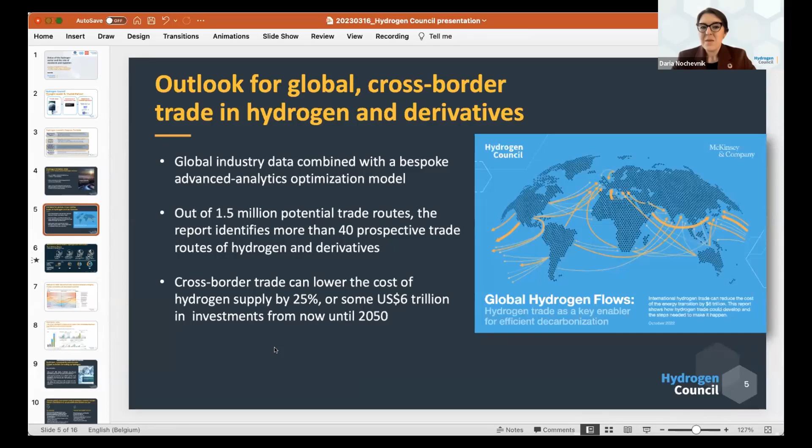Unlocking these investments and trade corridors would of course mean that the geopolitics of global cross-border trade in energy and commodities is going to evolve and change. We see a picture where the supply routes for some of the major demand pool regions are going to be much more diversified compared to the status quo. So in our study, we have identified some key phases in which cross-border trade in hydrogen derivatives would evolve.

We see that in the first phase, especially between now and 2030-2035, we expect high uptake in hydrogen derivatives, in particular ammonia and synthetic fuels.

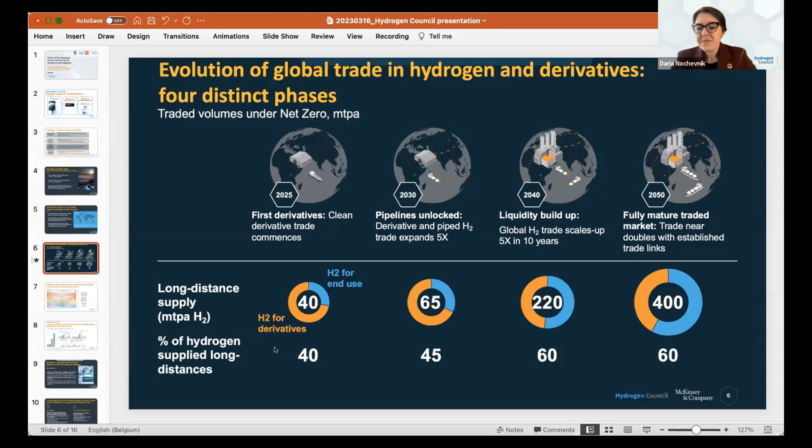Then between 2035 and 2040, pipeline infrastructure will be maturing and expanding in parallel with liquid hydrogen infrastructure. So we see pipeline and liquid hydrogen infrastructure picking up after 2035 and maturing in parallel with continued development of shipments in hydrogen derivatives.

We see that emerging market economies can play a significant role in this global hydrogen value chain that will be emerging over time. Some countries and regions, in particular Latin America, Namibia, and South Africa, are going to become prime destinations for the development of, for example, synthetic kerosene and its export globally. Brazil is likely to be one of the leading players in green steel.

We expect that some countries, in particular the Middle East and Chile, will emerge as the most cost-competitive suppliers of renewable and low-carbon hydrogen globally. By 2050, hydrogen costs could be brought down to less than $1 per kilo, thanks to exceptional solar potential, supported by wind, enabling renewable hydrogen production - and in the case of the Middle East, lowest cost natural gas coupled with CCS. So we see Chile, Qatar, Oman, Saudi Arabia, and UAE going forward as some of the lowest cost suppliers of renewable hydrogen globally.

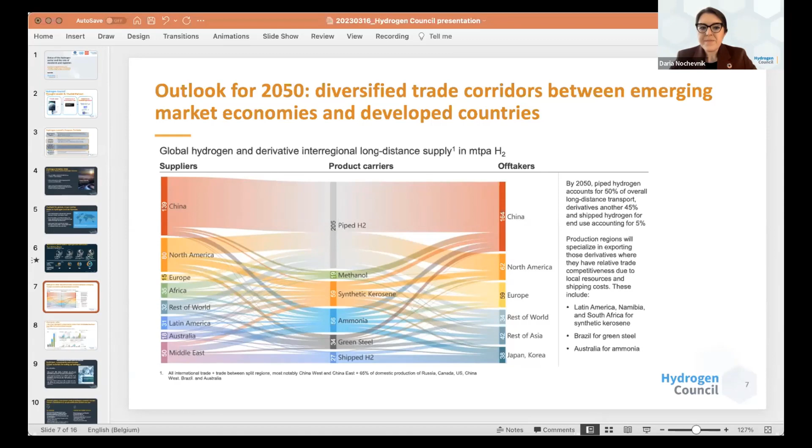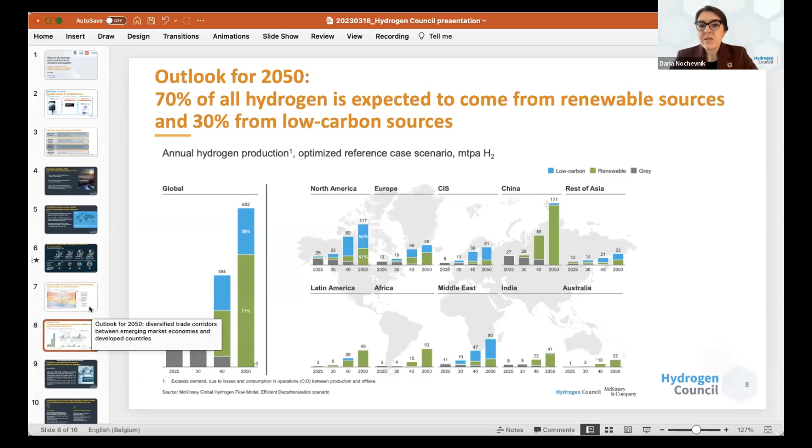This is just a snapshot of the modeling work that we have done, showing how by mid-century more than 70% of hydrogen traded globally is expected to come from renewable sources, if not more. So overwhelmingly, the majority of prospective trade flows will be focused on renewable hydrogen, and emerging market economies can play a significant role in this global hydrogen ecosystem that is already emerging.

Interestingly, we have also looked at the role of critical raw materials in the development of hydrogen ecosystems. One of the key takeaways is that we absolutely need hydrogen technologies to ensure that we don't substitute one dependency for another. A number of countries around the world are currently really concerned about dependency.

Dependency on either a specific type of energy source or a specific type of manufacturing supply chain component that is necessary for their economies to function. We see that with hydrogen and hydrogen fuel cell technologies, there's a real opportunity to ensure the sort of technological diversification that is crucial not only for our transition to net zero and decarbonization pathway, but also making sure security of supply is achieved through trade flow diversification, commodity diversification, and diversification of the core materials used in supply chains of clean energy solutions.

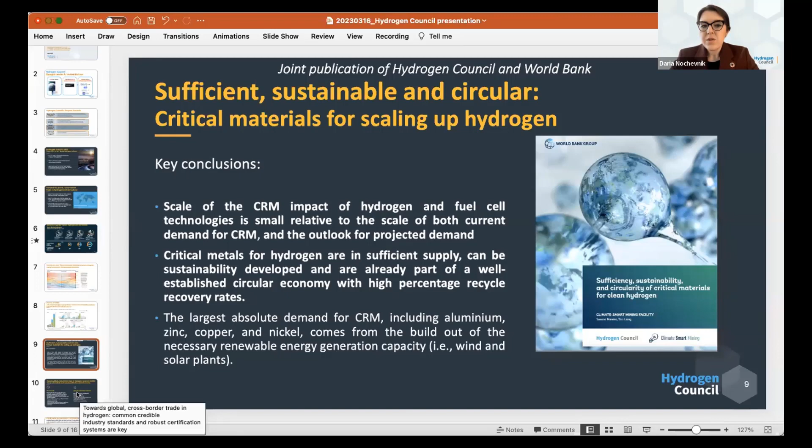As was mentioned already by our speakers previously, we truly believe it is crucial that emerging market economies take full part in the development and shaping of global standards, and rather than being standard takers, are indeed standard makers and contribute to the development of common global industry standards.

Within the Council, we are very much supporting the development of the relevant ISO standards, in particular the standard methodology for assessing the carbon footprint of hydrogen production, conditioning, and transport. I'm sure Andrei is going to talk more about this process in a few minutes, as well as the development of certification schemes for hydrogen. The two, of course, go very much hand in hand.

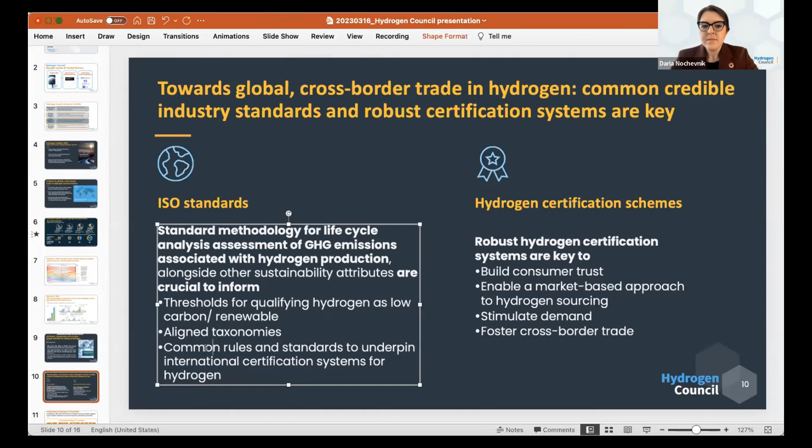I will skip through the slide briefly because I'm sure Andrei will elaborate on it more. But we see that the very foundation for the development of relevant hydrogen policies is around ensuring that we use a common methodology for assessing the carbon footprint of hydrogen production, conditioning, and transport in a way that is harmonized and coherent.

Oftentimes we talk about the development of different thresholds for hydrogen, for example, or derivatives - country A can have a threshold of 2 kilos of CO2 equivalent per kilo of hydrogen, and country B can have a threshold of 2 kilos of CO2 equivalent per kilo of hydrogen. But those 2 and 2 effectively may not be comparable unless there is a common methodology to calculate and arrive at those 2 kilos.

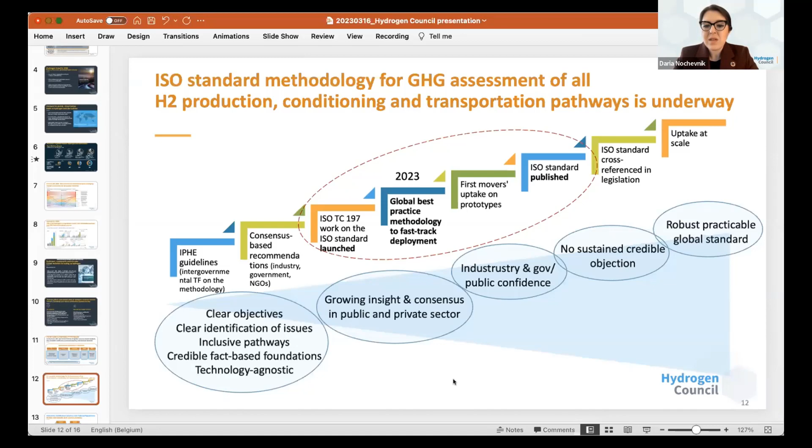So we see this standard methodology in particular as being the foundation for the development of the hydrogen economy and some of the policy choices that may be made in different corners of the world over the types of hydrogen that countries may wish to support. This is a way to ensure transparency at a global level, in particular allowing the least carbon-intensive solution to shine and the least carbon-intensive hydrogen production and transport pathway to reveal their climate benefits. We see this as an absolutely crucial piece, and I'm sure Andrei will elaborate on it going forward.

Just very briefly on the relationship between standards, policies, and certification schemes. Oftentimes those may be used interchangeably, but we feel it's really important to lay out the differences and the interlinkages between these clearly. ISO standards already play a crucial role in underpinning some of the global policies and policies adopted at national level.

For example, the EU taxonomy for sustainable finance that lays out the rule for qualifying hydrogen manufacturing as a sustainable economic activity refers to ISO standards as one of the options to assess in particular the carbon footprint of that hydrogen manufacturing process. So already ISO standards are informing national and regional policies.

Going forward, they will play a crucial role in informing also certification schemes for hydrogen, used to evidence that a certain unit of hydrogen has a certain carbon footprint, but also has relevant socioeconomic attributes and other elements of the sustainability characteristics of hydrogen beyond carbon footprint.

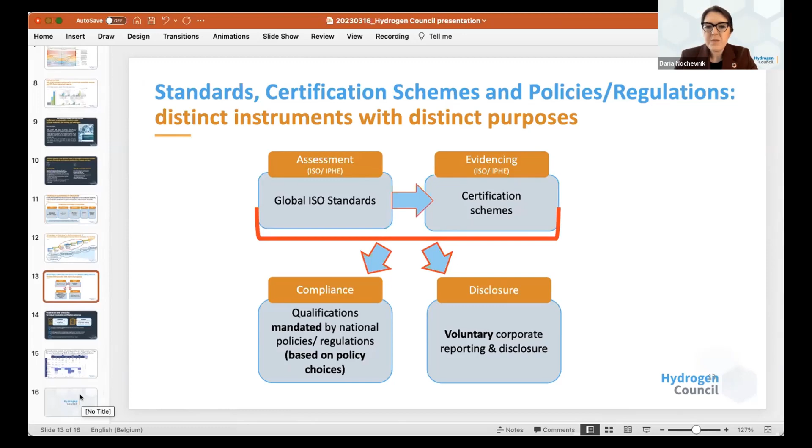We have carried out an analysis of existing policies and instruments that drive the need for evidencing the sustainability attributes of both hydrogen and derivatives. This snapshot, I'm not going to go through all the details in the interest of time, but it gives you a flavor of the diversity in approaches we see in terms of the policy choices regarding the types of sustainability attributes that governments wish to evidence as part of their compliance frameworks, and the approaches to evidencing that they choose.

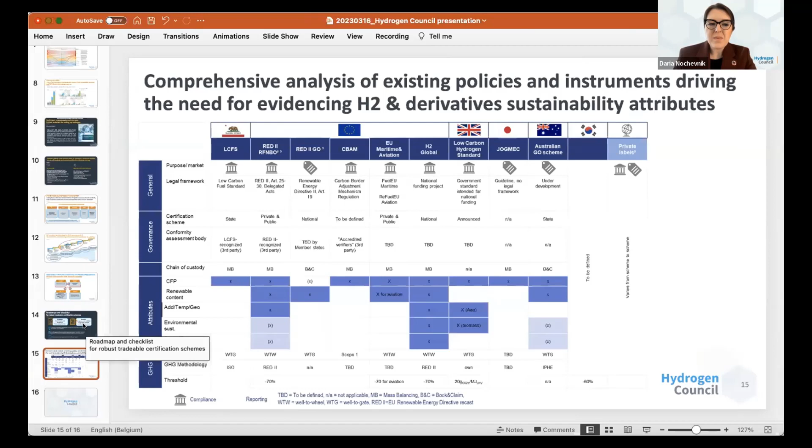This diversity of approaches is something we have analyzed and looked at very closely, and it informed some of the work we are doing currently. We're pleased to say that very soon we will be publishing a dedicated certification study, focusing in particular on how one can identify solutions for different approaches to evidencing sustainability attributes through certification to talk to each other, and how we can achieve a form of common ground for governments across jurisdictions and for relevant legislators to commit to mutual recognition between certification schemes for hydrogen and derivatives.

I'll stop here, but I would emphasize again that we see an absolutely crucial role for global international standards to inform certification schemes, and this is a good example of a tangible instrument that is required for the market to take off. Thank you.

Last year, the National Development and Reform Commission and the National Energy Administration released a plan for the development of hydrogen energy. The document points out hydrogen is an important part of the national energy system, an important carrier to green and low carbon transformation of energy and industrial department, and an important direction of strategic emerging industries and the future industry.

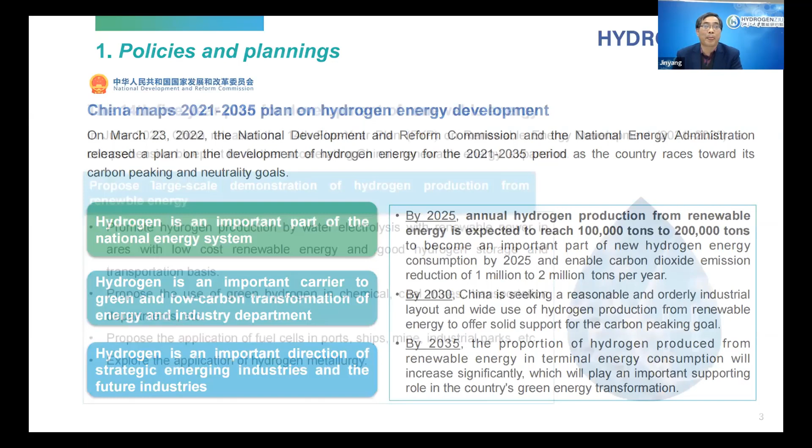Also last year, China released the 14th five-year plan on renewable energy development, a comprehensive blueprint for accelerating China's renewable energy.

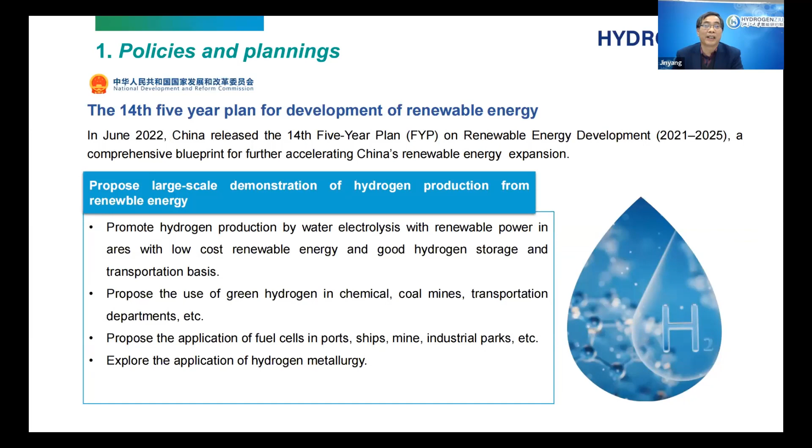Fuel cell vehicle technology research and development has been a highlight of the Ministry of Science and Technology for a long time. Since 2001, many research and development programs have been given to hydrogen energy. During the 14th five-year plan, from 2021 to 2025, a key national R&D program of hydrogen energy technology was taken, and 4 areas will be focused: green hydrogen production and scale transfer system, safe storage and rapid transmission and distribution system, convenient hydrogen upgrading and efficient power system, and comprehensive demonstration, hydrogen into thousands of homes.

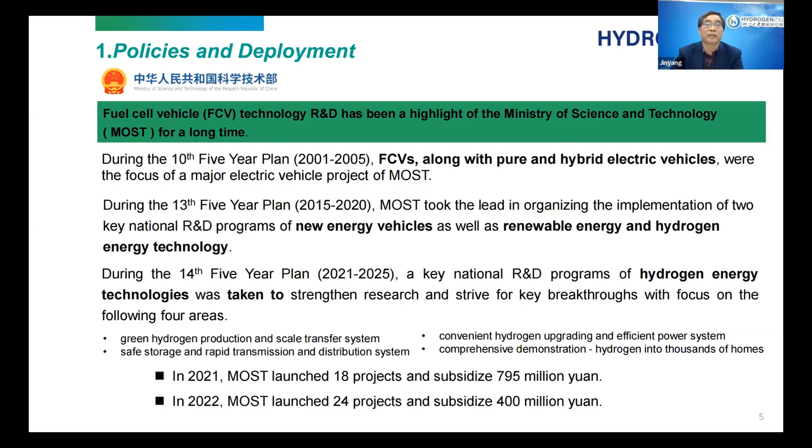Now come to development of hydrogen industry.

About 33 million tons of hydrogen was produced in China last year, which makes China the world leader in hydrogen output. According to analysis, in 2060 there will be 130 million tons per year of hydrogen required.

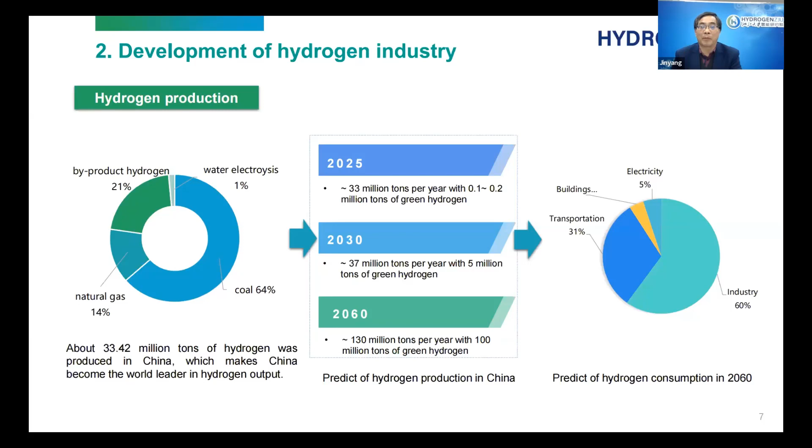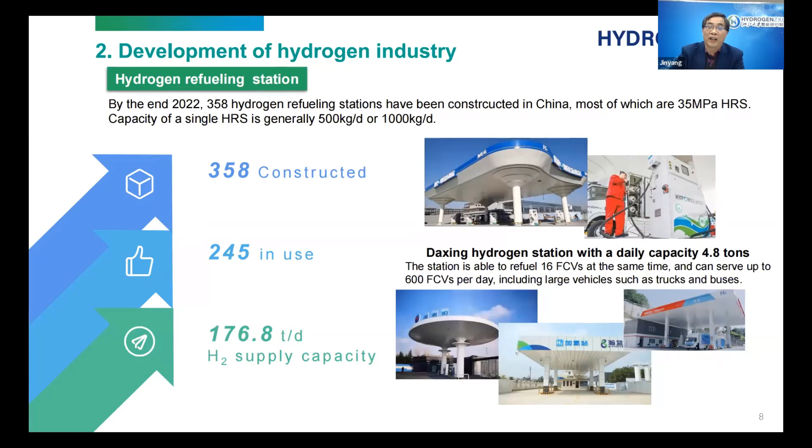About hydrogen refueling stations, by the end of last year, 358 hydrogen refueling stations had been constructed, most of them 35 megapascal stations, and 245 HRS are in use. The largest station is the Daxing hydrogen station with a daily capacity of 4.8 tons each day.

About electrolyzers, 3 kinds are developed in China: alkaline, PEM, and SOEC. For example, alkaline water electrolyzer, 5 megawatt alkaline electrolyzers are in mass production.

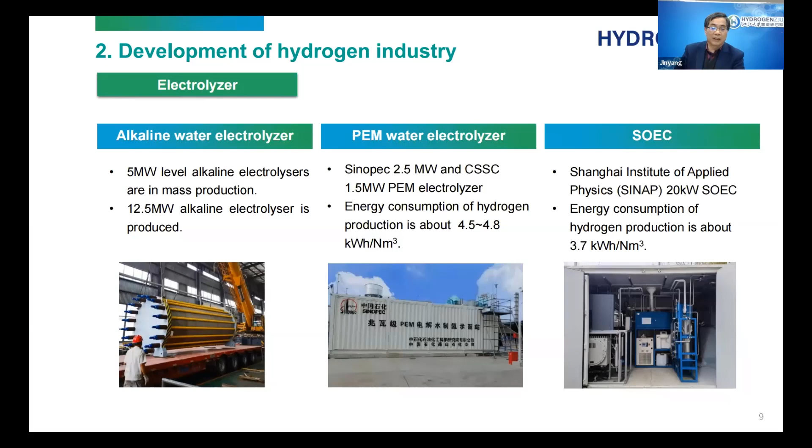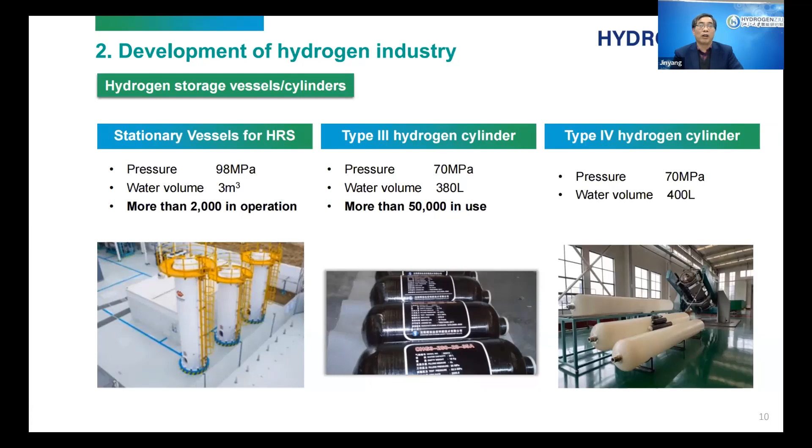Our national standard for type 4 hydrogen cylinders will be issued soon, with a pressure of 70 megapascal. We also develop test facilities for the hydrogen industry.

Here are 3 examples of such test facilities. One is metal hydrogen compatibility, with maximum pressure of 140 megapascal. Second is polymer hydrogen compatibility, with temperature ranging from -60 to 200 degrees Celsius. Third is high pressure hydrogen impact test system, with maximum pressure of 140 megapascal.

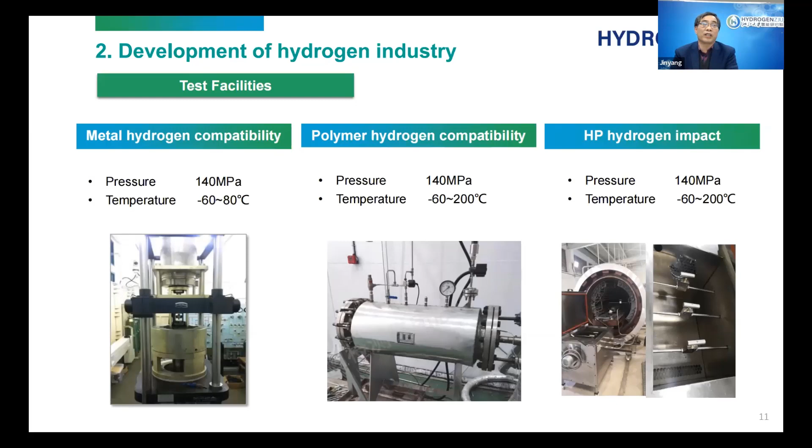We also develop standards for hydrogen production by water electrolysis. There are 2 standards developed by ISO, and we mostly incorporate this ISO standard into our national standard.

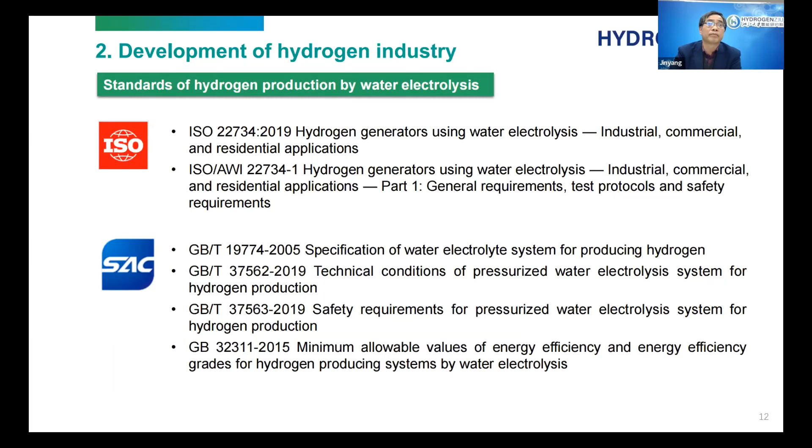About application, by the end of last year, the number of fuel cell vehicles in China reached 12,682, accounting for about 20% in the world.

Hydrogen vehicles were demonstrated in the 2022 Winter Olympics, the world's largest demonstration of hydrogen vehicles. Other applications include forklifts, bicycles, fuel cell hybrid locomotives, boat backup power, and aircraft.

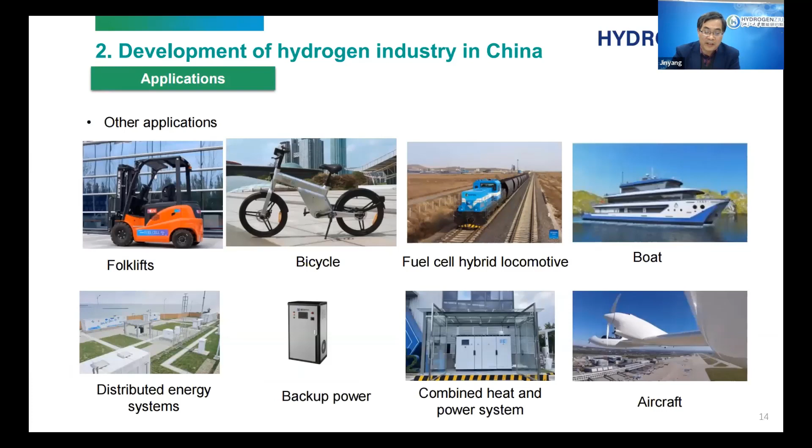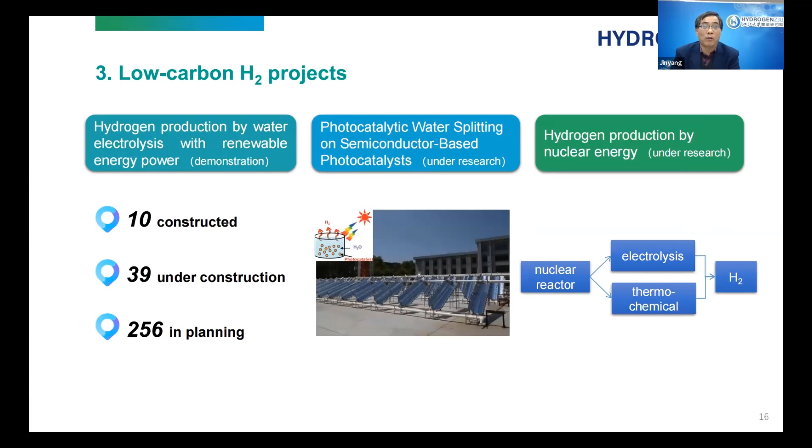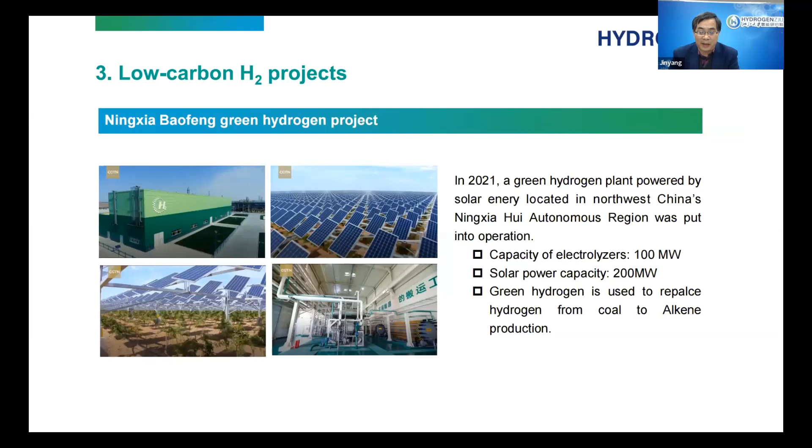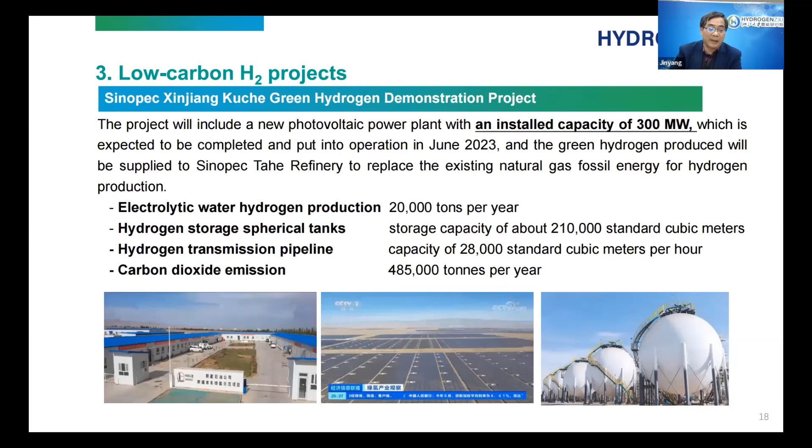Second is the Sinopec Xinjiang Kuche Green Hydrogen demonstration project. In this project, electrolytic water hydrogen production is 20,000 tons per year, and the hydrogen storage spherical tank has a storage capacity of about 210,000 standard cubic meters.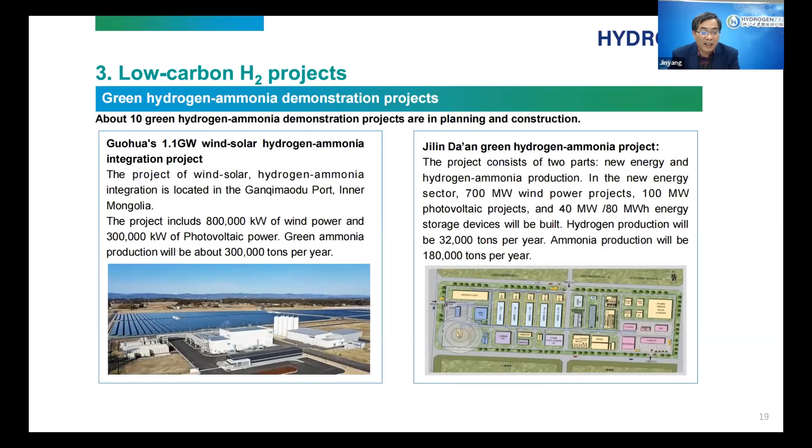The third project is the green hydrogen ammonia demonstration project. In China, there are about 10 green hydrogen ammonia demonstration projects in planning and construction. And the first green hydrogen methanol demonstration project is developed by China Coal and the Dalian Institute of Chemical Physics.

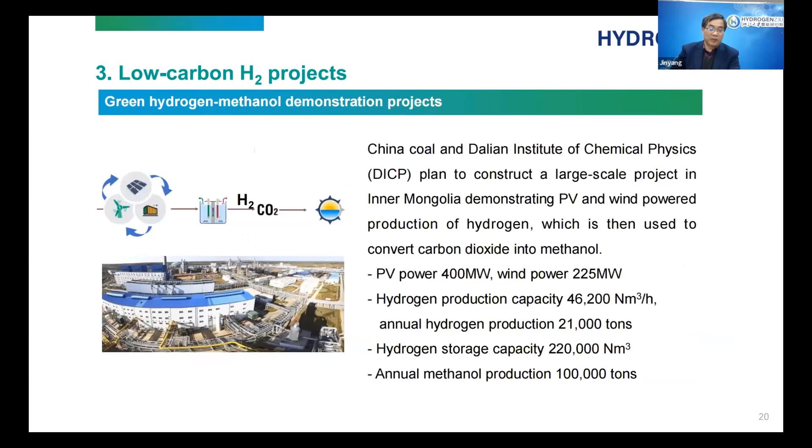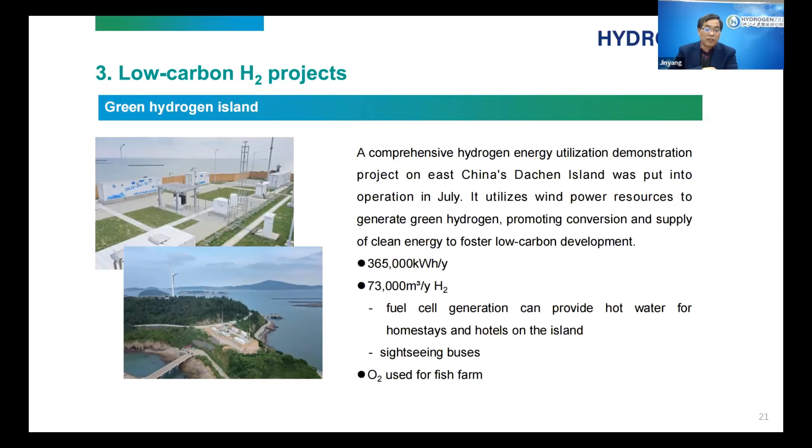Also, green hydrogen Island, a comprehensive hydrogen energy utilization demonstration project on East Chinese Dachen Island, was put into operation last year. We also have a comprehensive application of hydrogen energy project, a megawatt level demonstration station for the comprehensive utilization of hydrogen energy in East Chinese Anhui province.

About hydrogen storage and transportation, there are several projects on hydrogen pipeline construction. For example, the Gansu Yumen oil field hydrogen pipeline project, where the operating pressure is 2.5 megapascal.

AP have a liquid hydrogen project in the east of China, Zhejiang province, and the liquid hydrogen production is 30 tons per day.

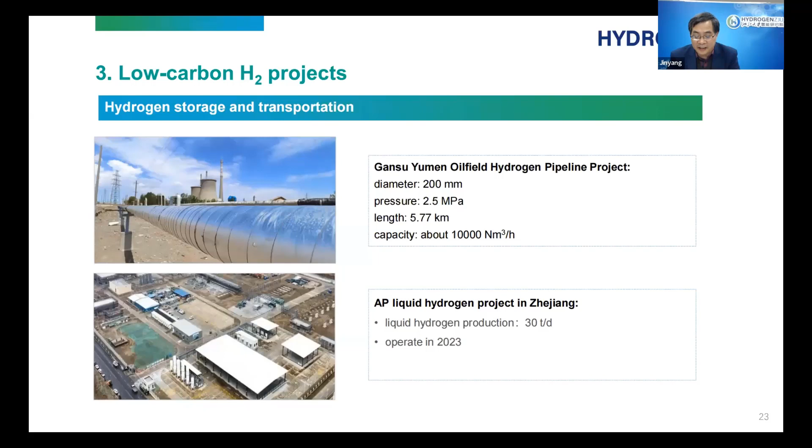Finally, I give some suggestions. Development of low carbon hydrogen relies on the development of low carbon hydrogen production technology. We should pay more attention on water electrolyzer and also new technology.

Application of low carbon hydrogen in different departments is very important. We should expand application of low carbon hydrogen.

Also, standard for low carbon hydrogen is very important. We need a standard to support low carbon hydrogen evaluation, testing, and verification. That's all, thank you very much.

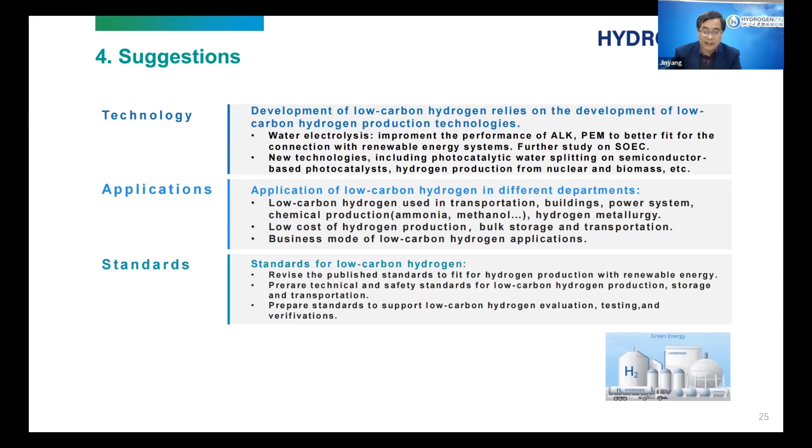Thank you, Dr. Jinyang, for that very clear presentation. We see that China has many projects all along the value chain of green hydrogen, and it is in line with the presentation of Daria, where we see that China is leading the deployment of electrolyzers. For those who are participating from countries that have plans or are in the process of planning green hydrogen or renewable hydrogen or low carbon hydrogen value chain,

we want to have this workshop to raise awareness of what is needed, especially in the area of standards. At the beginning, we mentioned that it is very important for different participants in standard setting, not only taking the standards once it's developed, and that is the role of ISO. Our next presenter is from ISO.

She will be presenting the role of ISO and how developing countries can participate in international standard setting. Roswitha Franz is head of planning and operations at the capacity building unit at ISO. Over to you, Roswitha. Thank you very much, Juan Pablo, for this nice segue from a very practical example of

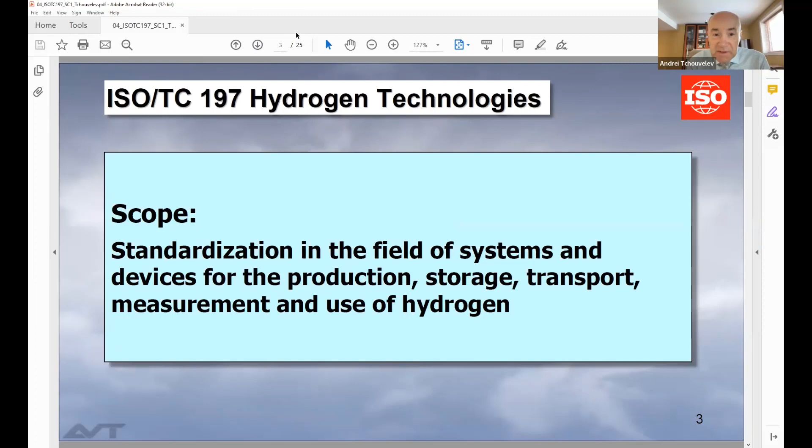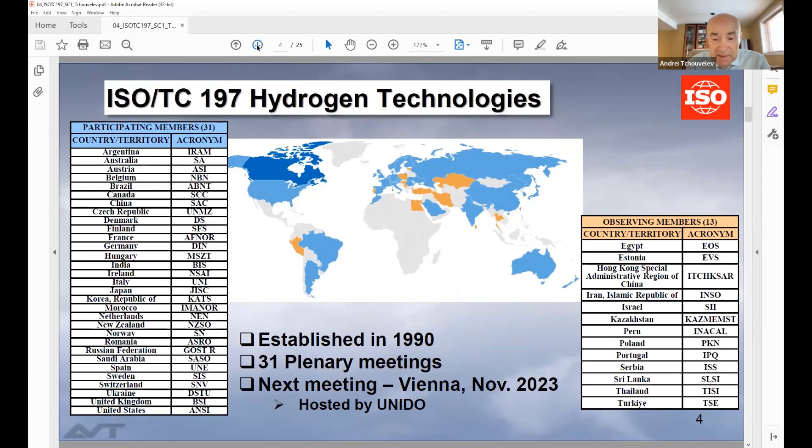So following Rosita's presentation before me explaining the process, please join the hydrogen standard development work and become the standard makers. Next slide, please. In the next 3 slides, I'll show you different stages of development so you can see the evolution—it's kind of mentally divided before COVID, during COVID, and after COVID.

Hydrogen Technologies Committee has been focusing traditionally on the core fundamental technologies for hydrogen. So the core experts include different production pathways and storage, mostly because this was the biggest challenge. Professor Chen showed some examples of the storage technologies used, both the large type 1 tank, shown on one of the slides, as well as the compact tank. That's a variety of applications, including pressure vessels and gas cylinders. So these were mostly the focus.

And in recent years, with the development and deployment of hydrogen fuel cell vehicles, mostly light-duty vehicles, that has been the primary focus of the last years, to make sure we support the hydrogen infrastructure for mobility.

So the standards highlighted in red are what has been published by 2020. You can see, for example, in the vehicle components, there's a mention of alignment with GTR 13, the global technical regulation, and the UNECE Working Party 29 that develops global technical regulations for hydrogen fuel cell vehicles. You can see direct reference to that, which means the ISO standards support directly the implementation of the global technical regulations, and this is very important.

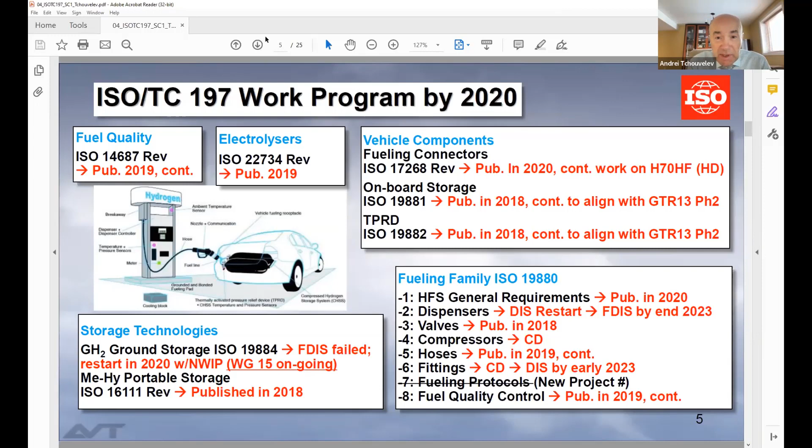That covers the period between 2020 and 2022, really during the COVID time, where we worked remotely. It was reflected in Professor Chen's slide when he mentioned electrolysis. So we split it into parts, one to address dynamic performance and safety, with reference to renewable energy connection and application, and the other standard for testing for grid service.

This is another important use of water electrolysis technology, where it can help balance the grid, which will be fed particularly going forward through renewable energy sources.

Very important work on safety. You can see ISO TR 15916, another revision specifically related to material compatibility and expanding the liquid hydrogen chapter. We anticipate that liquid hydrogen will play a more significant role. It was reflected in Daria's presentation on trade flows, and also shown in one of Professor Chen's slides related to pipelines. So material compatibility is a critical component.

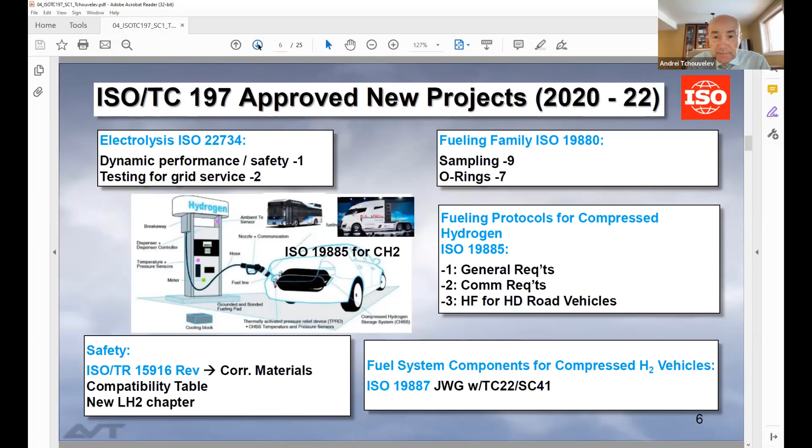Finally, going forward, the very recent work we approved: at the top is liquid and SLH2, which means subcooled liquid, a new liquid hydrogen technology which helps eliminate boil-off and improve the efficiency of fueling. These are revisions of very old standards, one from the last millennium, 1999, and the other from 2006. Those standards were influenced by participation from NASA at that point.

Now it's driven really by industry, by the heavy duty industry for road mobility, to make sure we have the standards in place. And you can see the CCH2, which means cryo-compressed applications, a new technology. That's a new project we just approved, and a new working group will be created to develop the related standard.

Now we go to the sustainability aspect within the subcommittee. One that we established last year: we started work on the methodology for determining greenhouse gas emissions associated with production, conditioning, and transport. That's the technical specification I'll be talking about a little later.

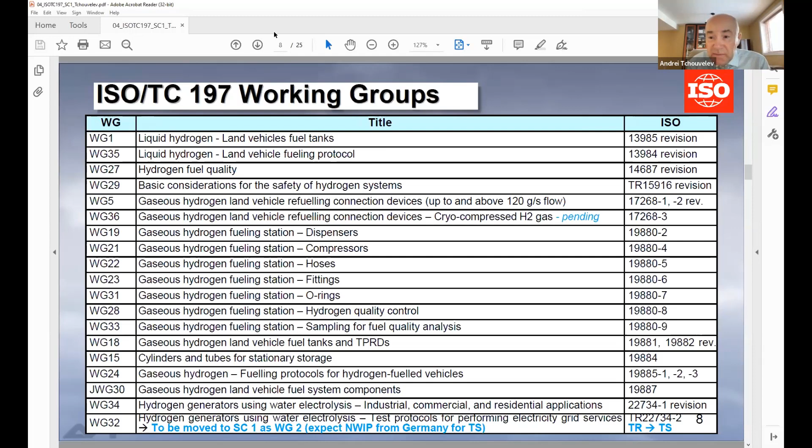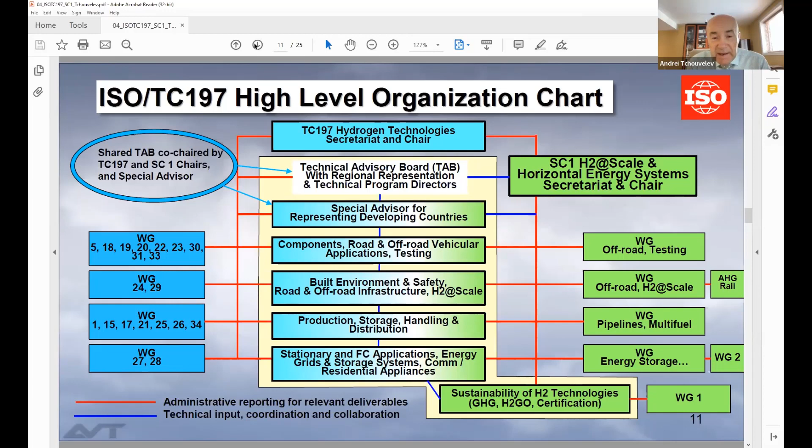That's really a very good explanation on the division of scope. TC-197 focuses on basic requirements on core technologies for hydrogen - production, storage, handling, built environment, and conventional mobility, which relates to road mobility: light, medium, and heavy duty. While subcommittee 1 focuses on applications of those technologies where hydrogen is a central link, so there could be overlap, obviously, with other fuels.

There was a question about ammonia - very good question, this is a tricky one. How we handle it: we will look at ammonia, for example, and LOHC, from the point of methodology for greenhouse gas footprint assessment solely. But looking at the specific other scope, we need to think about how we address that.

You can see also coordination with a variety of different stakeholders related to renewables and energy storage, multi-fuel systems, and various sustainability aspects. ISO TC-207 was mentioned, environmental management, as well as, for example, subcommittee 7 on climate change. We're collaborating with those different testing, different applications, including the residential - it's all kind of in the scope of collaboration. So next slide, please.

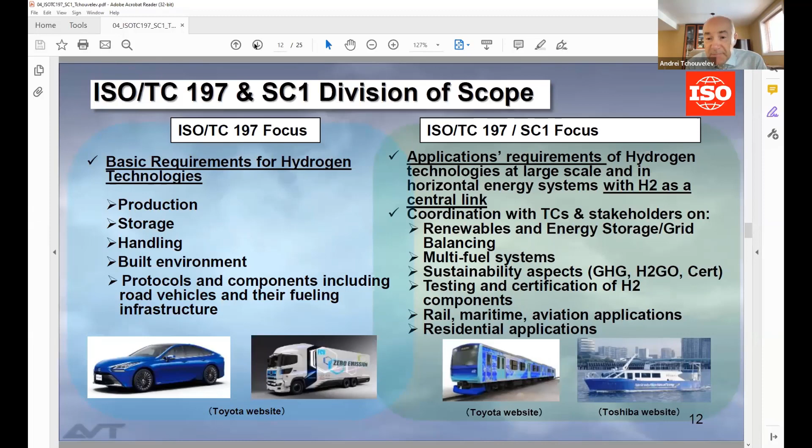Now specifically, well, that slide Daria already showed, so I'm not going to talk about it too much. So please, the next one.

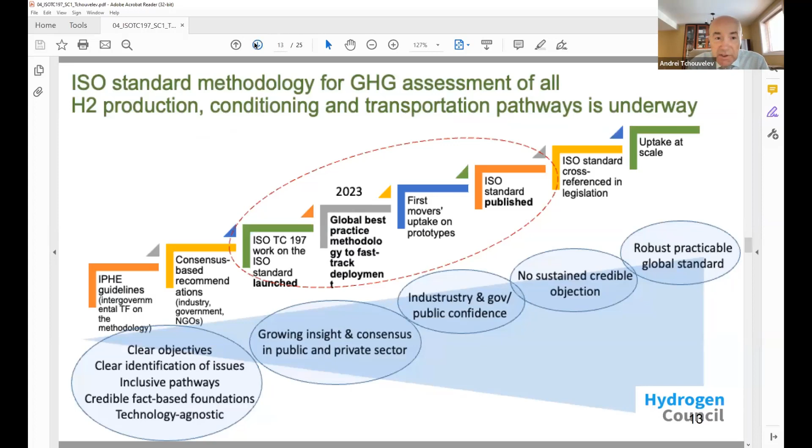As we discussed, we need to have a mutually agreed methodology for determining the greenhouse gas footprint. It's the first step and a very important part of the sustainability dimension that we're addressing. On the bar, on the left corner, you can see the title page of a working draft, submitted by IPHE, which will show on the next slide, but this is really the general approach.

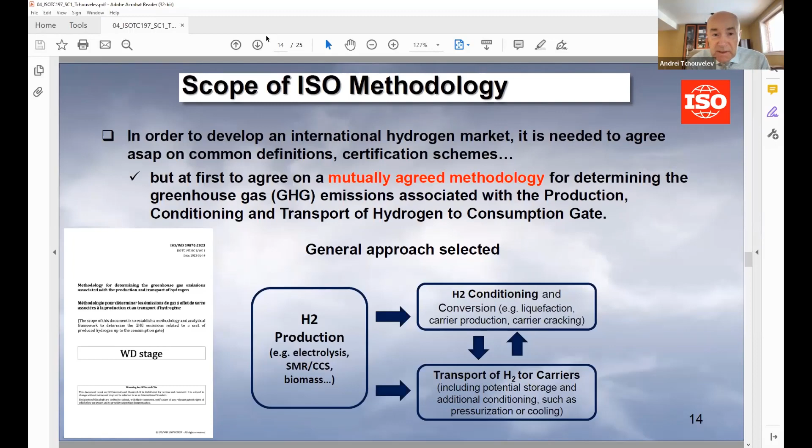We have hydrogen production pathways, multiple, including electrolysis, SMR with CCS, biomass, and so forth. We have hydrogen conditioning, meaning conversion, whether it's liquid, whether it's a derivative like ammonia, or whether it's LOHC, and then transport using different carriers. Next slide, please.

That's the guiding principles that were developed by IPHE, which is the International Partnership for Hydrogen and Fuel Cells in the Economy. The document, you can see the title page on the right, is available on the IPHE website. You can load it, but these are the guiding principles that we agreed with IPHE and adopted. That's foundational for this.

It should be inclusive, it should be flexible, it should be transparent, it should be comparable, and it should be practical. So these are the key words that are very important. And you can see, comparable means apples to apples.

Daria mentioned we are a data organization from the Hydrogen Council. Well, ISO is the science-based organization and also data-driven. So comparing apples to apples is extremely important. This example Daria gave about 2 and 2 may not necessarily be equal if you're using a different or non-consistent methodology for comparison. Next slide, please.

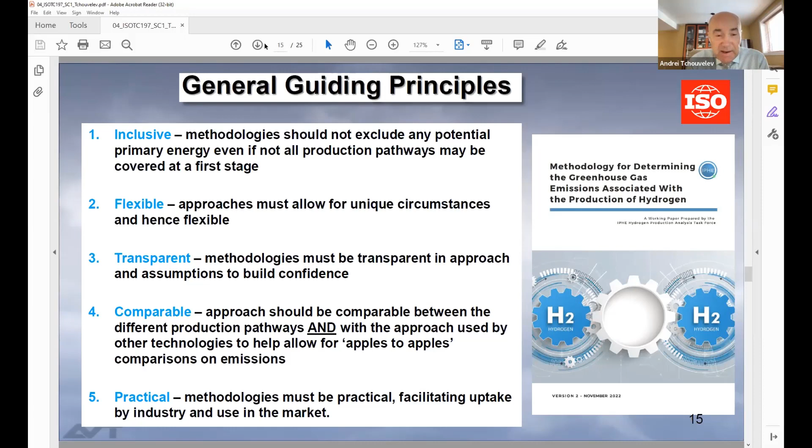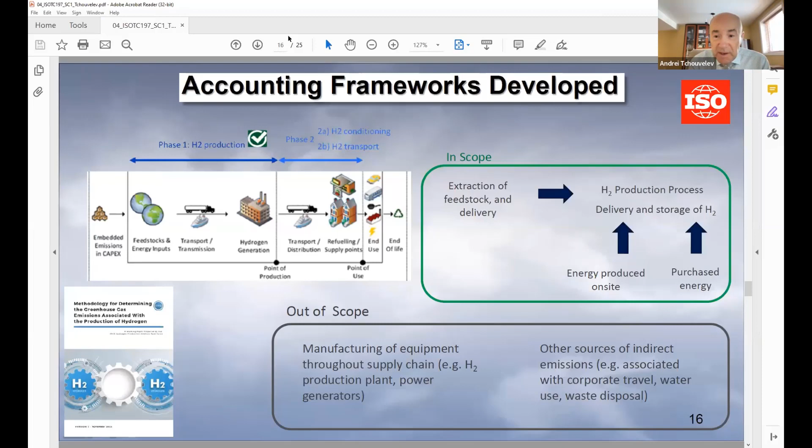In our technical specification, we would like to be comprehensive in scope: extraction, production, process, delivery, and energy produced and energy purchased, for determining the carbon GHG footprint. Out of scope at this point are things like manufacturing equipment, capex emissions, and other sources of indirect emissions, which are excluded at this stage. Next slide, please.

Evaluation methods - this is one of the critical points, and again underscores the importance of using key ISO standards for that. Those are developed by TC 207, as mentioned, and Subcommittee 7 of ISO. So 3 specifically most important standards that are being referenced, you can see them highlighted, 14067.

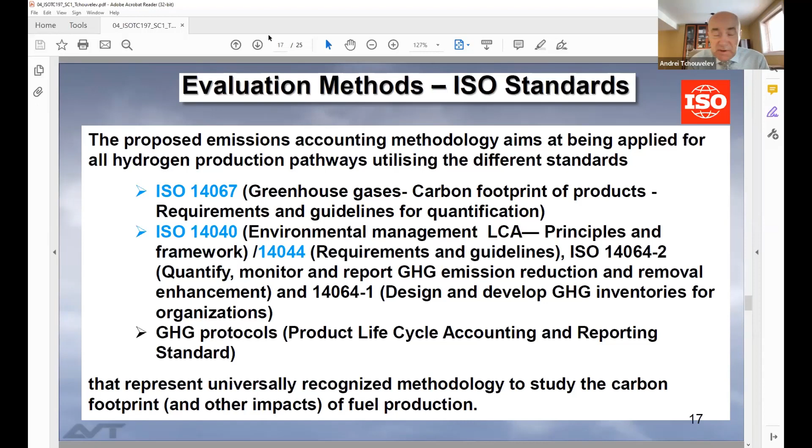It's the carbon footprint of products, and the 2 life cycle analysis key standards, 14040 and 14044. So they would allow for the solid foundation for comparison, and those represent universally recognized methodologies to study the carbon footprint of fuel production in principle. So we're applying those specifically to hydrogen. Next slide, please.

As an example, it shows the electrolysis production pathway. You can see I kind of combined 2 things in one for convenience. So these are the product system that is being taken into account. And again, this is an example - there are a number of technology pathways that are being analyzed in a similar way. So you have the product system. The dotted line is what's included in the assessment - the whole electrolysis, purification, compression - and then you have hydrogen as a product.

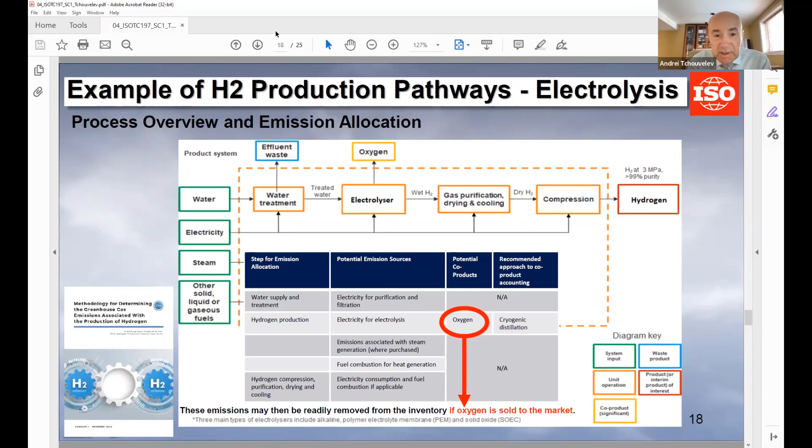And the emission allocation scheme, which is energy-based. This example shows that if you have a co-product like oxygen that's being used as a product, then those emissions are removed from the inventory for hydrogen - they're allocated to oxygen. However, if oxygen is vented, for example, which may be the case, then all emissions will be allocated to the hydrogen footprint. Next slide, please.

So the milestones, if you would like to join, please - we have the next meeting at the end of this month. The working draft has been circulated. The comments deadline passed and submissions were already made, quite a few comments.

In a couple of weeks we have the first meeting, then we circulate the committee draft in early April. The second meeting is planned for end of June in Paris at AFNOR to discuss comments. Circulation in September of the draft technical specification, and the final meeting before COP to finalize comments and prepare for publication. We'll go through the regular ISO process for publication, but the TS can be presented at COP as planned.

So it's very important that we agree at this stage to make sure we can do what we plan. In case of blocking points, this will go into the informative annex and be treated later when we start developing the suite of individual standards for production, conditioning, and transportation.

Next slide, please. So, other relevant committees: as mentioned, ISO TC 22 road vehicles, with two specifics - electric vehicles and gaseous fuels - critical for road mobility. ISO TC 58 gas cylinders, looking at transportable cylinders and composite tanks. Two environmental committees: environmental management and subcommittee 7 on climate change. From the IEC side, explosive atmospheres, specifically 31J developed for hazardous areas classification, and IEC TC 105 fuel cells. Very importantly, we will talk in a couple of slides about conformity assessment. And then current liaisons on rolling stock and maritime.

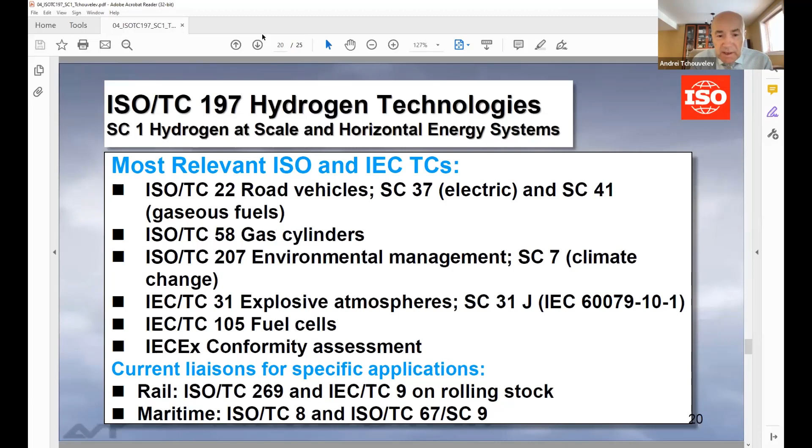The next slide will highlight the activities we plan for rail. Some developing countries are specifically very interested, and this creates the blueprint for other applications, which we can do based on the existing ISO TC 197 documents. So we created the ad hoc group H2 Rail, together with these two committees and ISO and IEC, with the objective to develop and implement the roadmap for hydrogen standards for rail applications.

We have launched the implementation plan, which will go through new proposals and establishment of joint working groups under subcommittee 1. The rail committees will provide the new work item proposals and nominate conveners.

This is the list of standards, developed for road mobility, which will be used as the core foundation for the new rail standards. New standards specifically for rail applications will be developed depending on specialization and number of experts in those committees - for fueling connectors together with ISO TC 269, for standards related to compressed hydrogen storage systems on board including containers and components, and importantly the fueling protocol and refueling requirements for compressed gas hydrogen refueling stations. These will be developed together with IEC TC 9, based on earlier developed standards by ISO TC 197.

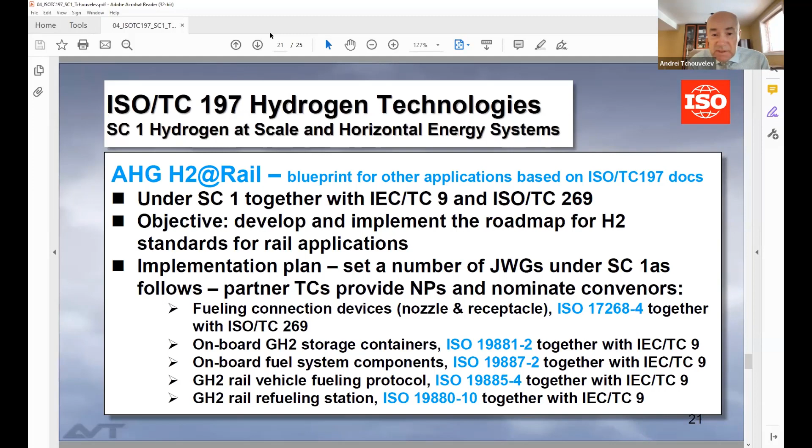Next slide. This is the final aspect I wanted to present. The question is, what happens after? A standard is developed, and if it's taken by the national bodies who developed it, the next step is applying it in practice. Those standards are very often referenced in national regulations and become part of them. It's very important that the equipment being built is compliant with those standards' requirements.

The process for it is called conformity assessment. What you see on the screen is an example - not the only one in the world, but I'm showing it because it's based on the IEC, the oldest standard development organization since 1906, which was the founding father of ISO in 1947. And since 1996, there's a new body developed called IECEx, whose purpose is to do conformity assessment for equipment, assembly services, and now even personnel.

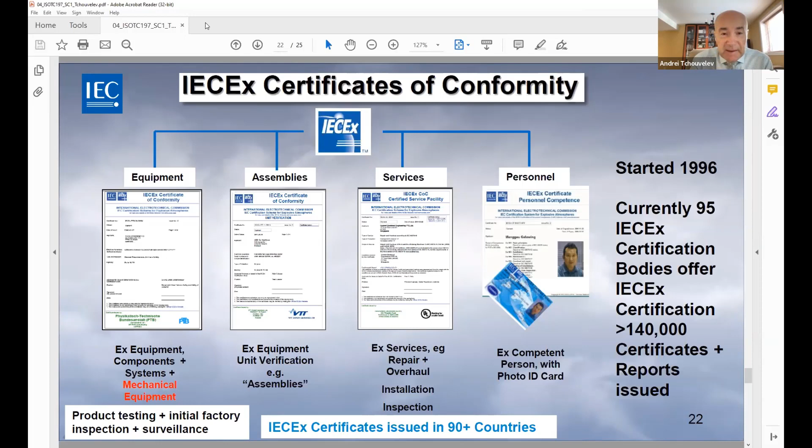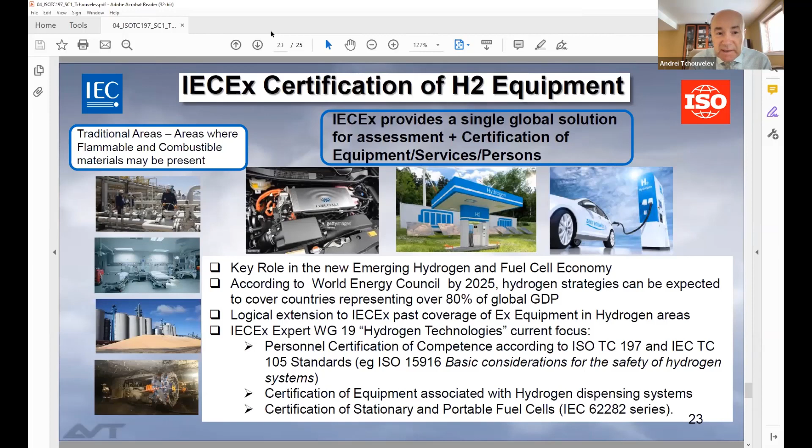So if we go to the next slide, that just shows it's the first of a kind.

It's really the new document that IEC developed specifically for the certification of hydrogen dispensers. We're finalizing it, going through the DIS and then FDIS stage for development of the dispenser standard. You see 19880-2, IEC has developed its own document to help do the conformity assessment on hydrogen dispensers. At the bottom, you can see a program that can certify personnel's competence based on another ISO document, basic considerations for safety of hydrogen systems, which is another very important aspect.

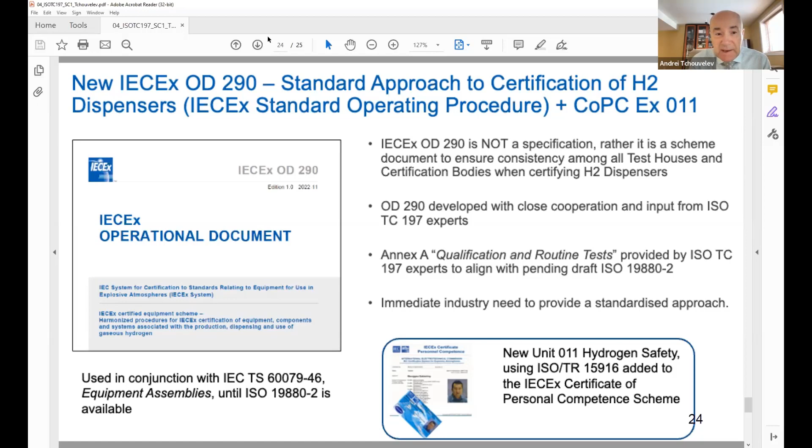Thank you, Andrei, for this excellent presentation and overview of the work, the technical work that the different technical committees and subcommittees are working on and envisage to work.

I have seen there are many questions out there. Before we go to the questions, I think it's very important to stress the importance for developing countries to participate and be aware of these standards, the certification process, everything around that standard, because in countries that have projects, this will be needed. It is completely necessary to anticipate the needs of countries looking to develop their green hydrogen industry, green hydrogen value chain. It's not only about standard participation, it's about making that standard conform to the standard, having all the elements to conform. Who is going to assess that against the standard? Is it an auditor? Is it an inspector? Who is the institution that has the competences to assess against a standard, to conform these conformity assessments that are needed?